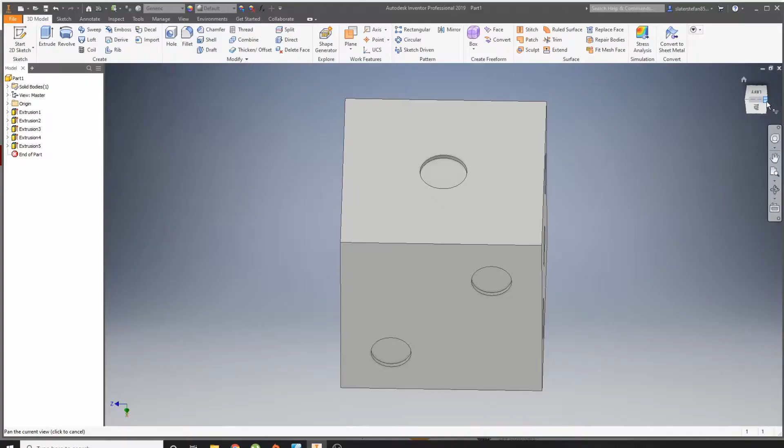Alright, so in this video we're going to make side number 5 and 6. I said it would just be 5, but side 5 is the same as side 4 and 1 put together. So I'm going to fly through this quite quick. I'm going to draw in a circle, make it 10, and I'm going to draw a circle in the centre. I'm going to make that 10 as well.

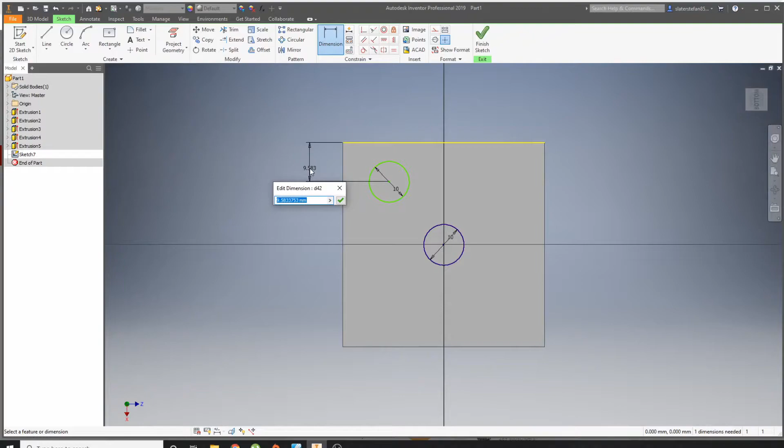You might have to dimension yours into place. That's already purple, so I don't need to dimension it. I'm going to click the edge, I'm going to click my centre, and I'm going to put this 12.5 and 12.5. Then rectangular pattern, I'm going to click my geometry, which is this circle, my direction is this horizontal line

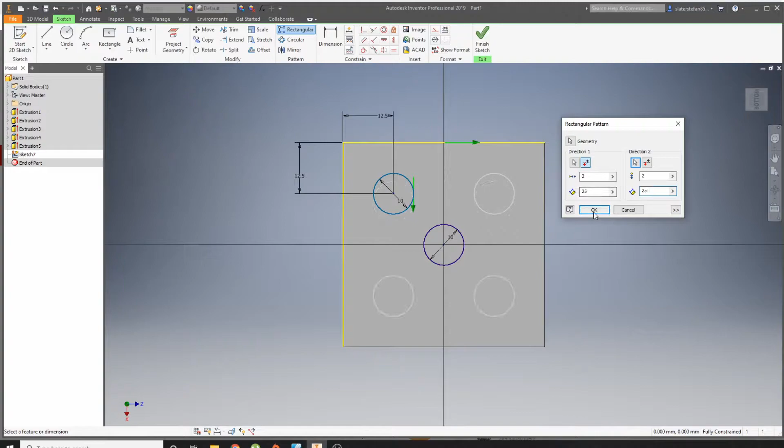and my vertical line, and I need to flip my horizontal line, and I'm going to just make this 25, 25, and finish my sketch. I'm going to extrude it, go to cut, select all my faces, and that's that. So that's very simple, just the same as side 4. Good to practice again and make it again.

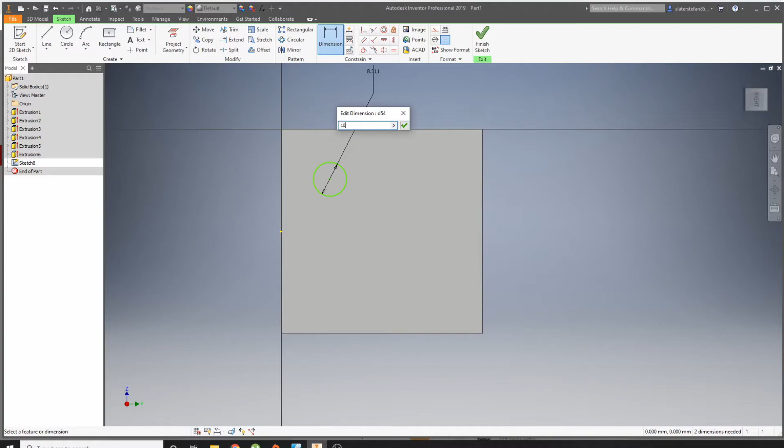So my side number 6, opposite of side number 1, I'm going to click onto this face. Now I can do side number 6 with just the rectangular pattern tool, but what I'd like you to do is to use the mirror tool to put in the opposite side. So I'm going to use the mirror tool. The mirror tool allows you to mirror things down a centre line. It's pretty self-explanatory.

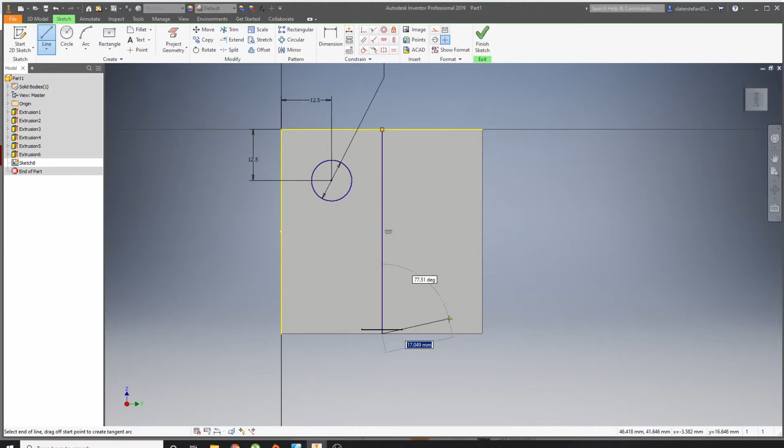So I need a mirror line for this. I'm going to go up to my line, find where it goes green, that's my centre, and draw a line. And just hit escape to come out of that tool. I'm then going to go to mirror, click my geometry, it's just saying select there, but it's the same as the rectangular pattern tool, and I'm going to click my mirror line, hit apply. That will duplicate it over to the other side.

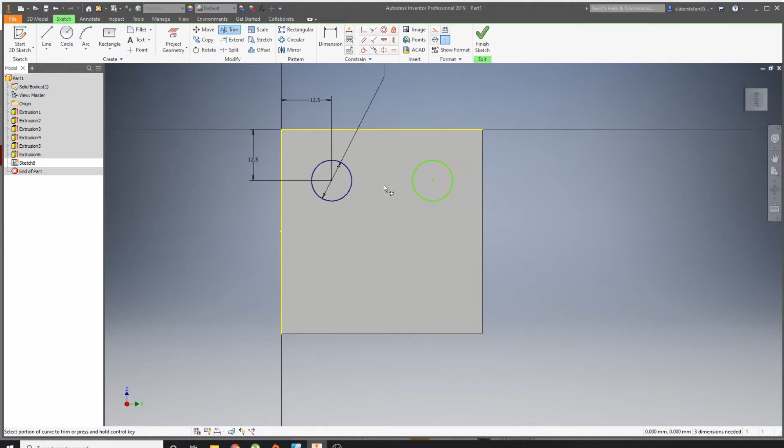Then to get rid of that centre line, I'm going to trim away this, and then I'm going to rectangular pattern, and I'm going to select 2 geometries this time, this circle and this circle, and my direction is just going to be my vertical line. I'm going to click 3, I'm going to flip it, and I'm going to make these 12.5 for my spacing, so they're all evenly spaced across.

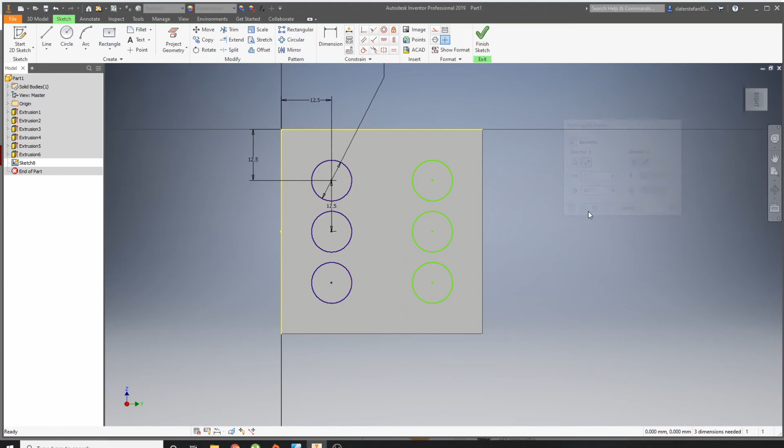Finish my sketch, extrude, same as we've done before, going up to cut and clicking OK. So that's side 5 and 6. Went through that quite quick, because it's all the same things that we've been doing before, but that's just using the mirror tool, which can be handy in a few situations.